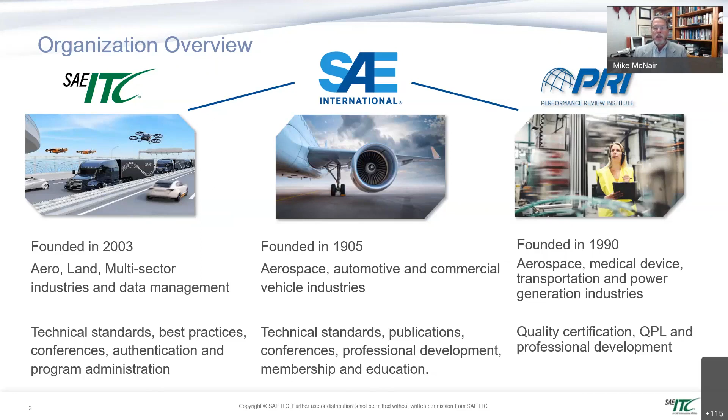So looking at this from a different point of view, with SAE ITC, we bring organizations together. SAE International brings individuals, experts in their fields, together. But there are moments where within an industry it is important to bring organizations together so that they can collaborate with one another and solve problems and address issues that exist at an industry level. In doing so, we've put together forums or consortia to make that happen and to facilitate that communication and cooperation.

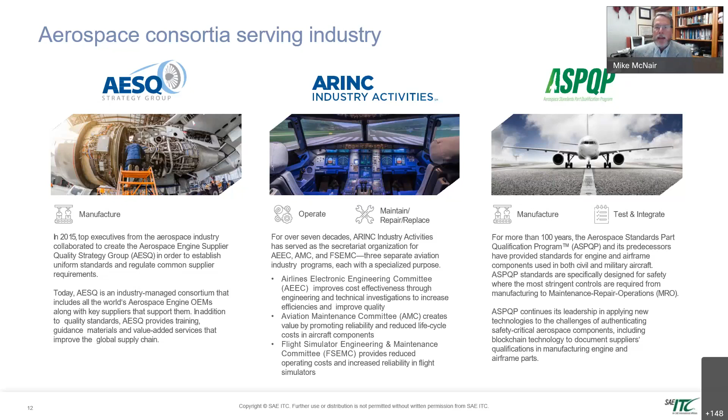We also have programs in our land-based area: the Automated Vehicle Safety Consortium, the International Alliance for Mobility Testing and Standardization, the Mobility Data Collaborative, and the Product Identification Number for Off-Road Vehicles program.

Each of these addresses ground-based vehicles, but because of commonality in technology and tools, we see a collaborative effort between aerospace and land-based programs, and that effort between the two is very profitable and very useful.

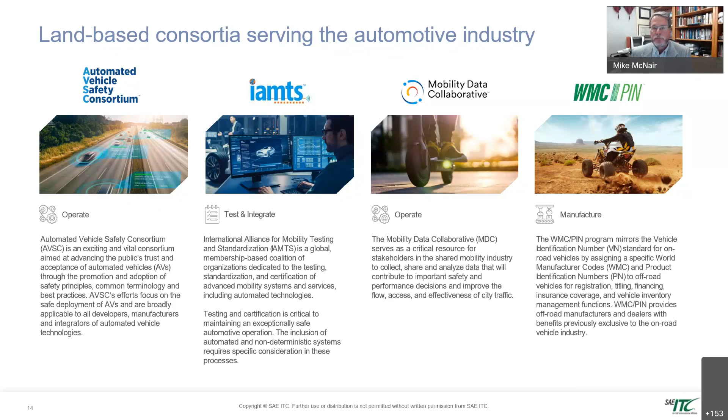You can see in a similar diagram the span of these land-based programs and how they stretch across different areas of ground transportation.

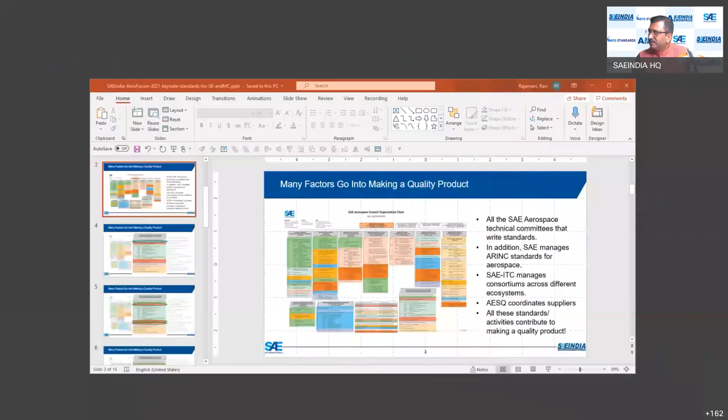Thank you, Venki, that was a very nice introduction, and thanks for the invitation. Now let's see, how do I get this to work? Let me know when you can see my screen. We are staying on... Yes, we can see your slide. Kindly put it in the slideshow if you don't mind. That's a tough one, okay, let's see. Okay, over to you, sir.

What are you seeing, are you seeing the presentation or are you seeing my screen? I am seeing aerospace standards for efficiency and quality. Is it the speaker view or the presentation view? A full view, presentation view. Yeah, so I don't have to mess with it. All right, this has always been a problem for me. I'm glad I figured it out this time.

All right, so I'm going to talk about efficiency and quality, which is what Ravi Kumar asked me to talk about. I think one part of it is sustainment - that's what I'm going to concentrate on, because that's really what I'm interested in. Hopefully that is something I'll make you guys interested in as well, and hopefully some of you can join us in this journey.

Efficiency and environmental quality is the big deal these days - these are some of the big programs happening. I'm sure all of you know Pipistrel got its certification, the first time an electric aircraft has been certified, which is great, but many more are coming. There's also hydrogen going on. And the conventional OEMs are not falling behind - they are also increasing efficiency with their geared turbofan, open rotor concepts, and the ultrafan. So the world is moving on - yes, the future might be electric, but it might be other things as well.

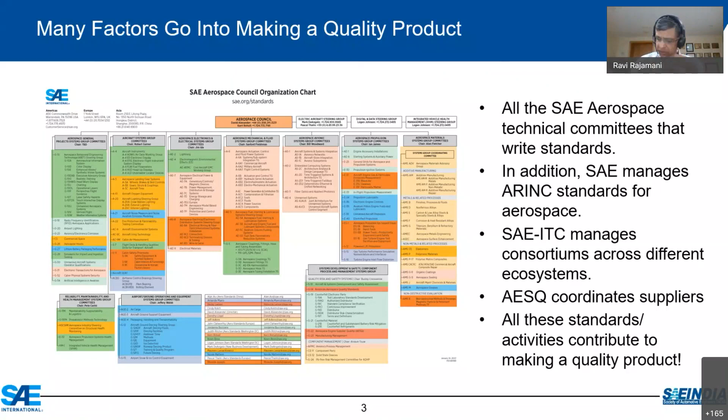Between SAE and ARINC, the organization produces several thousand aerospace standards. I think David gave you a good idea of the total number of standards, so I won't go into that. In terms of design and certification, which is really the key to having a good quality product, there's the systems development, safety, component processes, and management.

The systems group includes S18, G19, G22, etc., and G14. This is the group which actually deals with the basics of design and certification and quality within aerospace projects.

The quality standards come under this systems group. The counterfeit parts and materials, which is what you heard about yesterday, also falls under this. So this is probably one of the best systems groups to associate yourself with if you're interested in the area of design and certification.

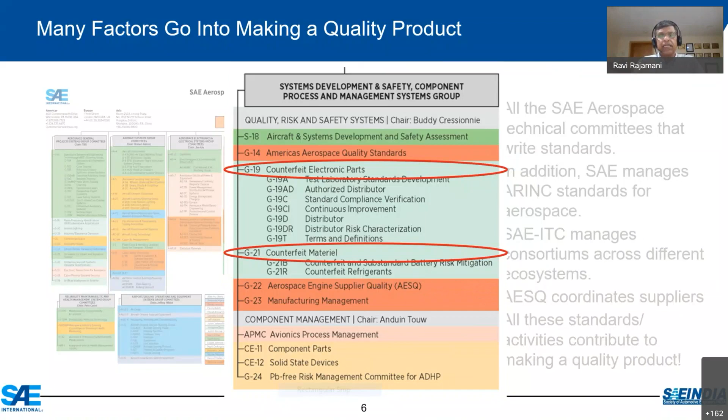As part of this is one of the most important groups within SAE, which is S18, which produces 4754 and 4761 and many other related documents. This is something I know a lot of you are very familiar with.

In terms of the systems engineering process that brings about an aerospace product to fruition, these are the tools that are needed within it. And as you can see, safety is a big deal in this, as part of the design process.

But it doesn't end there. Certification has several aspects to it. There is the product, as you can see, which is the airframe, the engines, the propellers, and all the subsystems associated with this. There's also the process, which is the manufacturing, the software development, as you guys are very familiar with, DO 178 and 254, etc.

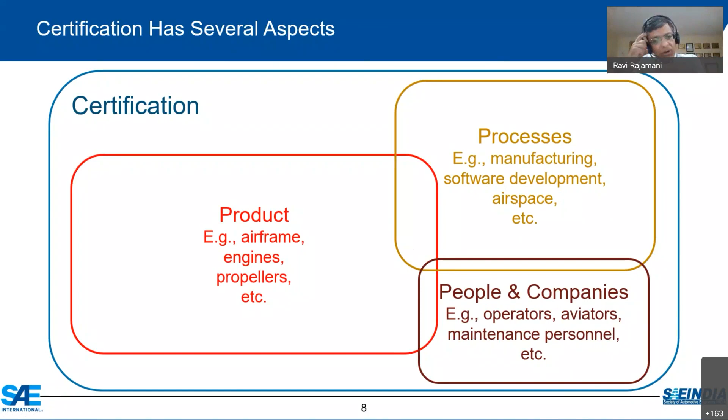The airspace as well, air traffic management, all that has to be certified as part of the safe aerospace environment that we live in. But there's also the idea of certifying people for flying, for maintaining, etc., and also the companies, because the processes associated with the manufacturing depend on the companies that actually run it. So they have to be certified as well. So there's a huge ecosystem that goes along with this whole certification process.

But it's not just design and certification. One of the major things within this ecosystem is how to establish rules for maintaining these aircraft as they age. That is where instructions for continued airworthiness come in. This is the way regulators develop rules, or actually work with industry to develop rules, to ensure that the aircraft can be maintained over its life cycle. It includes airworthiness directives, engineering changes, bulletins, etc., as a lot of you are well aware of.

But two of the main items are the instructions for continued airworthiness, which is documentation that gives instructions for how to maintain, and also the limitation section, where you have to be very, very cognizant of when things run their course, what is the usable life of a part, etc.

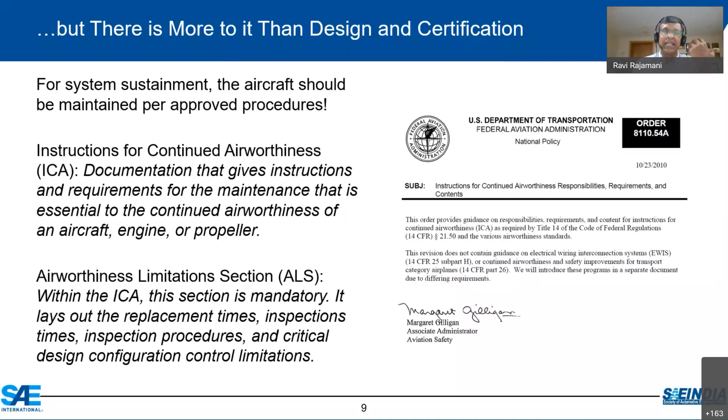So this is a key part of the aviation sector, which sometimes gets ignored. I wouldn't say ignored, but it's not as sexy a topic as the design and certification part of it. However, we in the health management community are very much in this part, and the IVHM, the Integrated Vehicle Health community, is involved with the regulators and with groups such as the MPIG, which actually develops guidelines for maintenance in the aerospace area to develop all these standards.

So I will highlight a few of these within the IVHM steering group. Rhonda Walthall talked to you about the IVHM steering group yesterday. For those of you who attended, I am now the chairman of this group.

Within this steering group, we have the E32, which is the Propulsion Health Management Technical Committee, the AISC SHM, which is the Technical Committee for Structural Health, the HM1, which is the IVHM Technical Committee, and the G11, probabilistic methods and maintainability. They're actually changing the name a little, but it hasn't been finalized yet.

Some of the key documents that have been published in this area of continued airworthiness and the use of health management functionality and systems within this ecosystem are ARP 5987, which is how to get maintenance credits, and it is now being worked on and being updated.

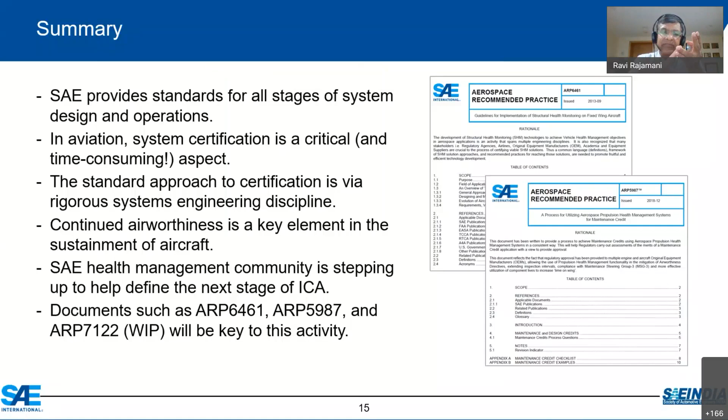It lowers costs, but increasingly it also enhances safety, which is key to sustainment. With that, I thank you. Are there any questions?

Any questions in the chat box, members, SAE team? So far we have not received anything, Dr. Ravi. That's perfectly all right. I have one question.

This is regarding the maintenance credits you mentioned, in terms of the cost savings. Do we have the necessary approvals from the FAA and EASA as of today, or is it in the process? Very good question.

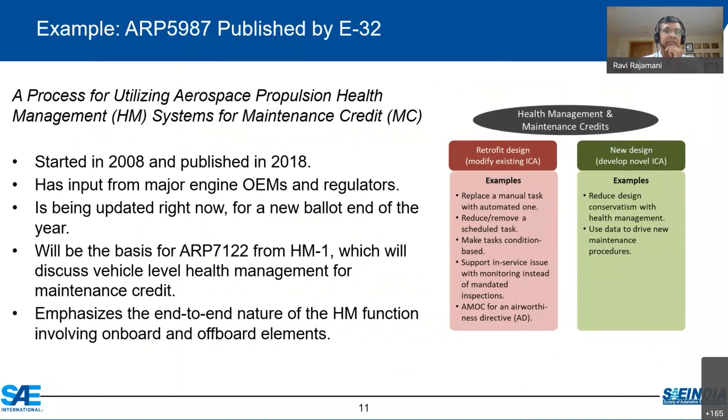For the rest of the audience, that is one of the biggest initiatives we are taking within the steering group, the IVHM steering group. We have an initiative to work with the authorities as well as the MPIG to develop processes whereby health management systems can be approved.

Let me give you a couple of documents that the regulators are working on. One is Advisory Circular 43-218, which is on guidance for how to certify health management systems. It has not been published yet, but it has gotten all the feedback from the industry. It is going to be published anytime soon. We are working with that group.

The other group we are working with is headed by the FAA. It is called the IMRBPB, the International Maintenance Review Board Policy Board, with 10 major regulators. I'm really surprised that India is not part of this, considering it is the second biggest aviation market.

Well, third biggest today. I think that DGCA should be part of this. I'm going to see how we can change that one of these days. But they come together and figure out how to regularize maintenance rules across the world. And they work closely with MPIG.

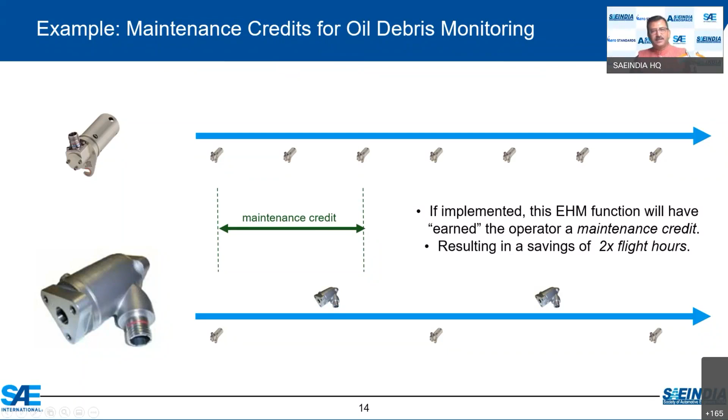So, ladies and gentlemen, after having listened to SAE ITC and the IVHM story, now it is time to move on to UAS. You can be seated wherever you are, but we're going to send it to the unmanned aircraft systems session with Dr. Mark P. DeAngelo. The scope of unmanned aircraft systems and autonomy is enormous, encompassing small drones, large UAVs, fixed wing, traditional rotorcraft, eVTOL aircraft, conventional power plant configurations, and distributed electric propulsion, DEP.

Don't tell anybody, SAE India has just completed the first ever Urban Air Mobility virtual symposium last week. Guess who was the chief guest? The chief guest was the Honorable Minister for Civil Aviation, Shri Jyotiraditya Scindia. And on the second day, the chief guest was the Joint Secretary of the Ministry of Civil Aviation, Mr. Amber Dubey.

So now over to the speaker introduction. Dr. Mark is an aerospace engineer and aerospace initiatives manager for SAE International with over 13 years of experience. He is the SAE spokesperson for Advanced Air Mobility, AAM standards and integration activities, collaborating with SAE, NASA, FAA, ICAO, and industry. Dr. Mark co-chairs the Airworthiness Group, WG1, and co-authors the ANSI UAS Standards Collaborative Roadmap to support rapid development of needed standards to facilitate safer and faster integration of UAS into the National Airspace System, NAS. He actively supports the G34 Artificial Intelligence in Aviation Outreach Committee and its podcast. Dr. Mark earned a BS, MS, and doctoral degree in aerospace engineering from Penn State University. He also holds an FAA Part 61 private pilot certificate.

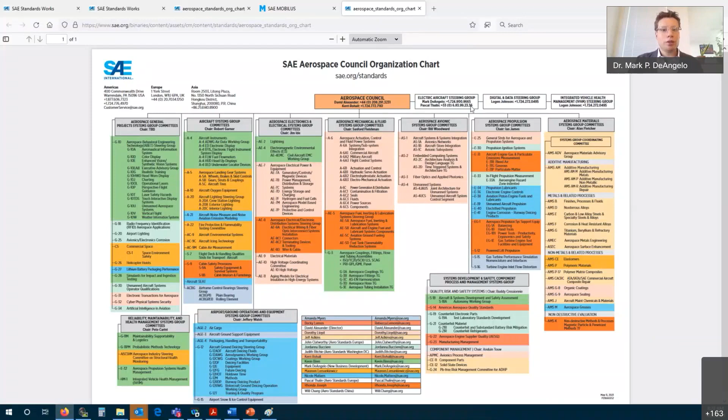So back to our presentation. Again, I wanted to emphasize that there are over 200 of these committees, and they cover the wide spectrum of aviation-related topics, aerospace-related topics, and a UAS is an aircraft. So if you're going to design, develop, certify, build a UAS, you're building an aircraft. So there are thousands of SAE standards that go into the design, the development, the production, the operation, and the support of an aircraft in the aircraft ecosystem. So many of those standards apply already, just as they would to a manned aircraft because it's an aircraft.

Now, there are some specific provisions for UAS, and there's some specific aspects of UAS that make UAS a little more unique. And with that, I handpicked some standards committees that have some specific documents or have documents specifically for UAS. So we're going to just dive right into those committees and those documents.

Now, as mentioned before, just before me, Ravi Rajamani mentioned the ARP 4754 and the S18 committees. Well, this is an overview of that committee. S18 is a joint international committee with EuroCAE WG63, Aircraft and System Development and Safety Assessment. It brings together qualified specialists for the advancement of aerospace safety and to support effective safety management and development processes.

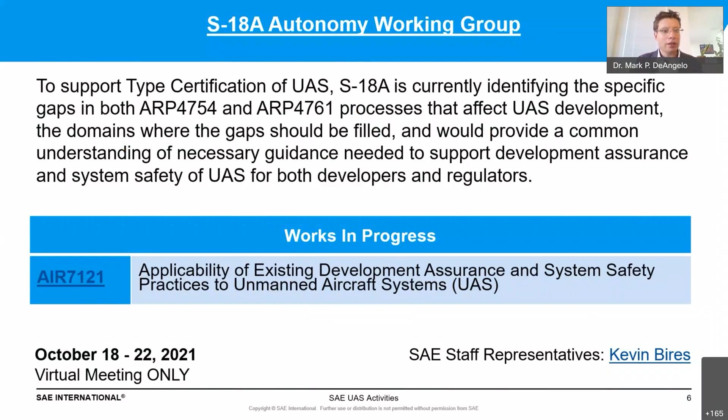All of these published reports call out and annotate SAE G34 and EuroCAE WG114 as the standards committees to develop standards for AI in the aviation ecosystem. This includes the ANSI standardization roadmap for UAS, the EASA AI roadmap, the EASA concept paper, the AVSI report, the Fly AI report, and NASA's upcoming AI roadmap.

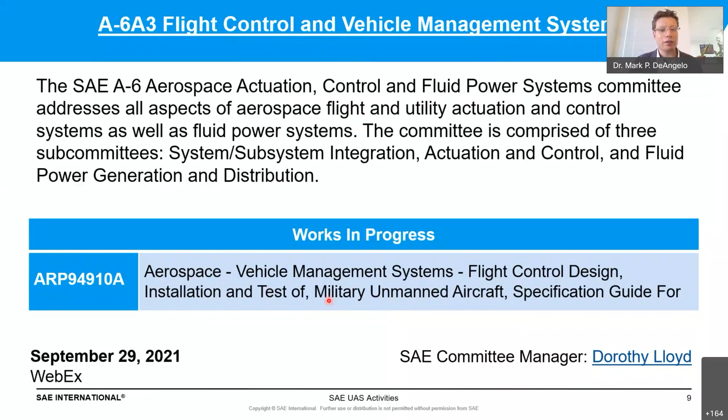They have 3 subcommittees and are working on a document for the flight control design, installation, and test of military unmanned aircraft. This next committee is the AS4 JAUS. It is a message-based architecture that defines data formats and methods of communication among computing nodes. The architecture defines messages and component behaviors that are independent of technology, computer hardware, operator-used communications equipment, and vehicle platforms.

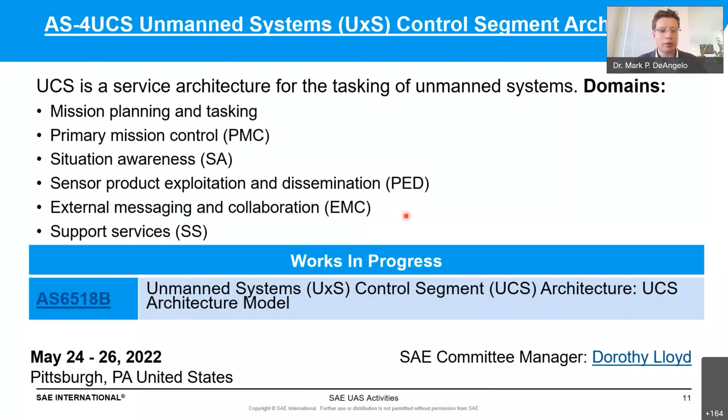This committee, and the next committee AS4 UCS, are standards committees developing products specifically for the United States Department of Defense, but their standards could be used by anyone, including civil domains as well. The E39 Unmanned Aircraft Propulsion Committee published their first standard, ARP 6971, for power and torque determination for UAS engines. This sets a standard for determining the engine performance.

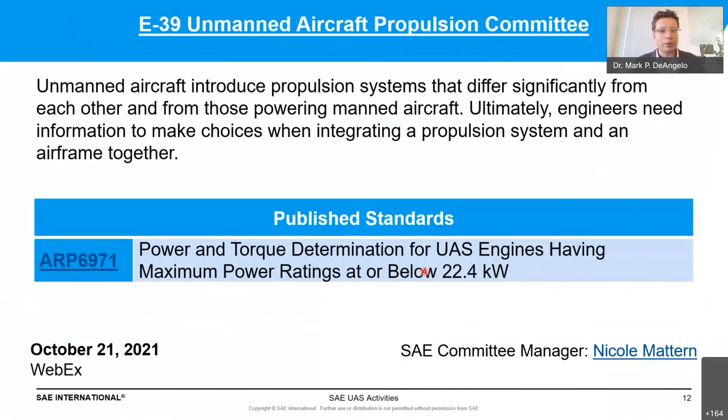A20B Exterior Lighting Committee developed a standard for lighting applications for UAS. AC9C is the Aircraft Icing Technology Committee, which deals with airborne de-icing, the aircraft de-icing itself, not to be confused with ground-based de-icing which sprays aircraft with de-icing fluid—we have that committee as well, but this one deals with in-flight de-icing. They're working on a document called AIR 6962, Ice Protection for UAVs.

Next slide, AE8A, Electrical Wiring and Fiber Optic Interconnect Systems Installation. They have a document for wiring for all types of aerospace vehicles, and they're analyzing the impact of high voltage on wiring as well.

So where could we get all of this stuff? It's accessible on SAE Mobilus, a great research platform, as well as SAE.org. This helps you search for all kinds of content, anything from standards to tech papers, journal articles, videos, courses, just about all the types of content we have, and books as well, edge reports.

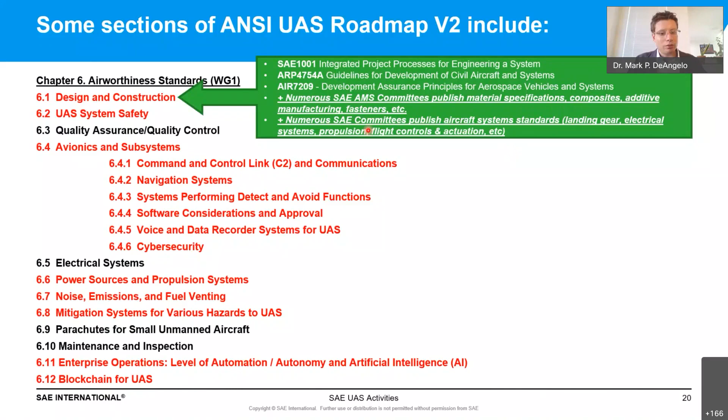Then if we jump down to UAS system safety, you have your ARP 4761, and for continued operational safety, you have ARP 5150 and 5151A. For quality assurance and quality control, you have the family of AS9100 standards, which is the quality management standards, as well as the counterfeit avoidance standards. Those include G19, G21, G22, and G33 configuration management standards as well.

Then when you look at command and control link and communications, there are numerous SAE ITC ARINC standards that can apply. For navigation systems, we have the SAE PNT committee, position, navigation, and timing.

These standards are listed here, as well as the SAE, ITC, ARINC standards. PNT has launched a specific standard to fill gaps identified in this roadmap, SAE 1026. This standard was just launched.

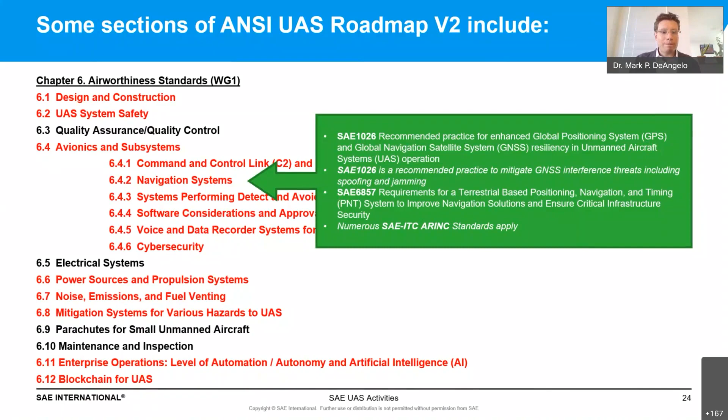Next, we have systems performing detect and avoid functions. I jumped ahead—this should be pointing to the software considerations.

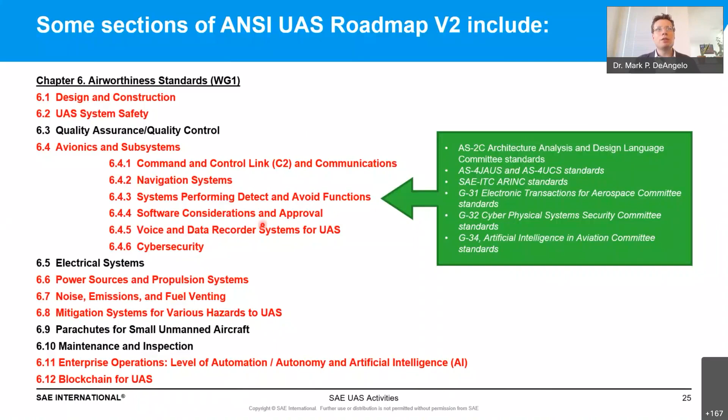This group of standards is for voice and data recorder systems, and for cybersecurity, the G32 committee is developing these documents listed here.

For electrical systems, there are several committees. Many are AE committees, like aircraft and aerospace electrical committees 2, 4, 7, 8, 9, and new high voltage committees such as AE10 and AE11. A6 and A20 also tie into electrical systems, especially flight control systems and electromechanical actuation.

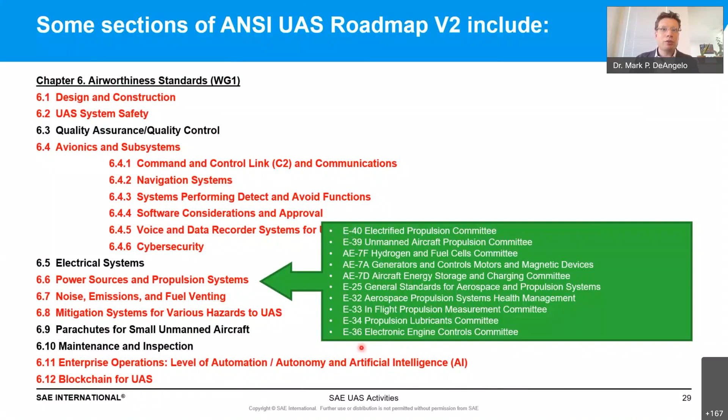For power sources and propulsion, there are many SAEs—one of our biggest strengths in standards is in propulsion systems, so there are many committees developing standards for propulsion systems.

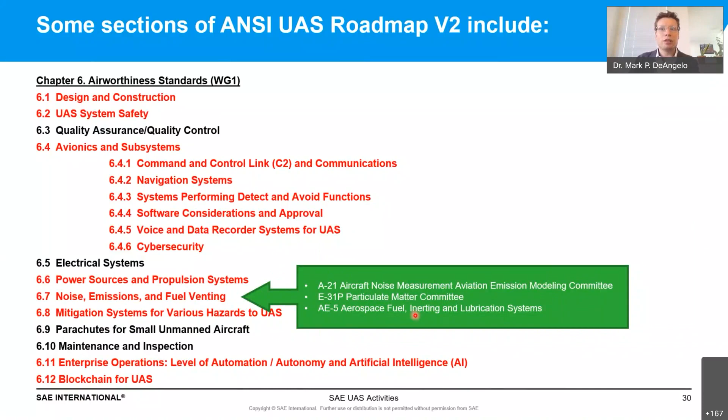For noise emissions and fuel venting, we have a noise committee, A21, E31P on particulate matter, and AE5 on aerospace fuel inerting and lubrication systems.

To protect aircraft, we have ice protection, icing technology, aircraft ground de-icing with G12, and a lightning committee to protect aircraft from lightning strikes.

At the bottom, we have AI and autonomy, comprising SAE S18A and G34. And again, for continued operational safety, we have these standards.

We also have the commercial services as well—Ritesh will talk a little more about this. And on chapter 10, for UAS flight crew, we have these standards and committees as well.

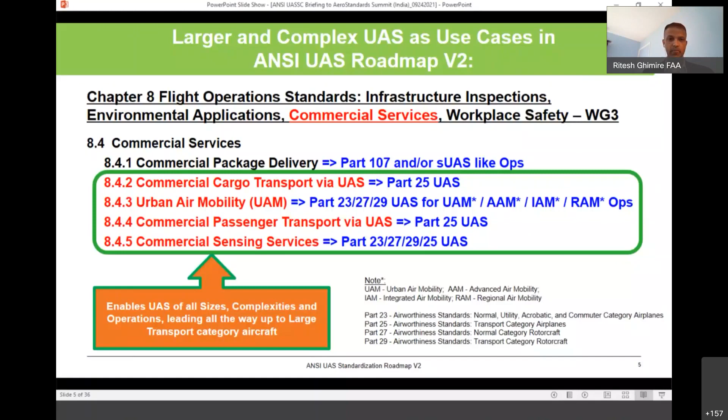So in summary, the scope of the roadmap is the UAS of all sizes, complexities, and operations. This slide here shows that standards are needed to support the remote control station (CS) of UAS of all sizes, complexities, and operations.

And the control station topic is placed under section 6.1, design and construction. Again, this section really encourages - we do not task any committee or working body or organization - this section encourages industry to get together to start thinking about developing needed standards to address the remote control station.

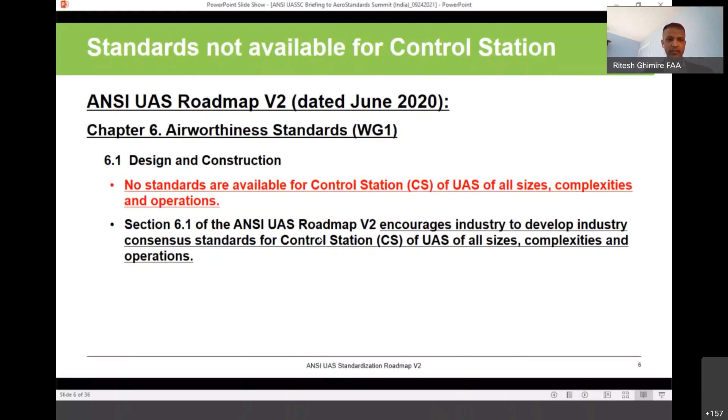Last year in June, we published version 2 of the standardization roadmap. And just a few months ago, in June 2021, ANSI published the GAPS progress report. This report is 47 pages long, full of tables about which committee has published what document in the last year since the publication of version 2, and which committees have created new work in progress, or WIP, in-development standards. This progress report will be very handy for all of you, especially engineers and scientists working for government think tanks and industry in India. It's a very slick document, and version 2 of the roadmap is 412 pages long, but thorough and comprehensive, highlighting activities of all the standards bodies, pertinent government agencies, and international entities that have been directly and indirectly involved in UAS or drone standardization and integration.

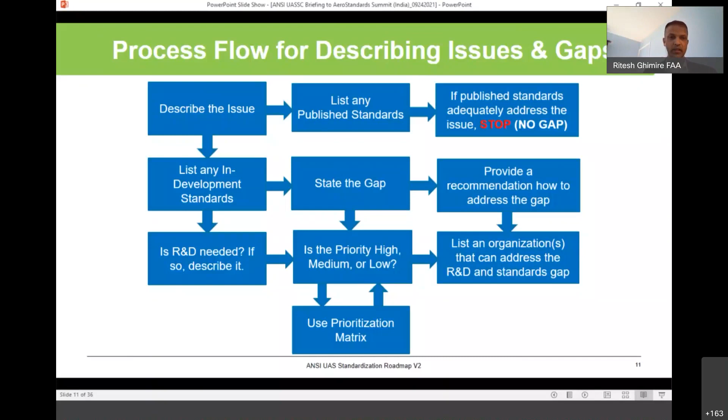We use the prioritization matrix to evaluate the different priority levels: high, medium, or low. Then we also tag along with the list of recommendations on how to address the gap, as well as the listing of organizations that can address the standards gaps and the associated R&D component to it. So these are just two components that we use to calculate, in our prioritization matrix, the composite quantified value.

In this case, we use C-A-S-E. C stands for critical aspects, which deals with safety and quality implications. A is whether we can achieve it or not, or time to complete, and the corresponding numerical values.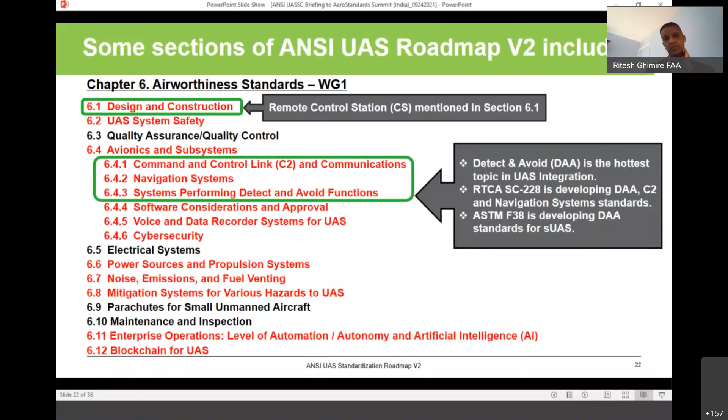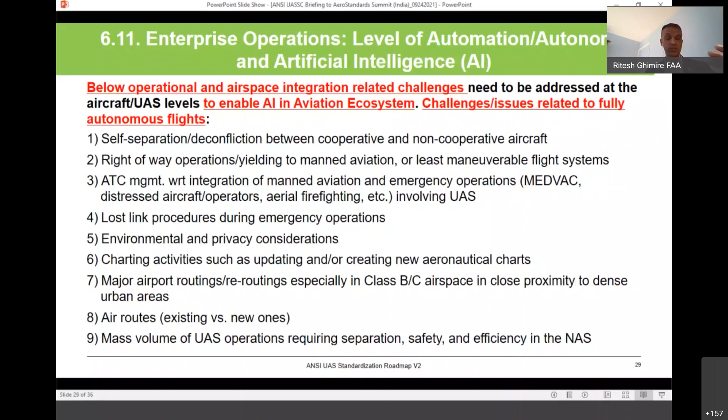This has the list of operational and integration challenges, some of which we need to address at the design, development, and certification phase of unmanned aircraft. So again, this is what it looks like.

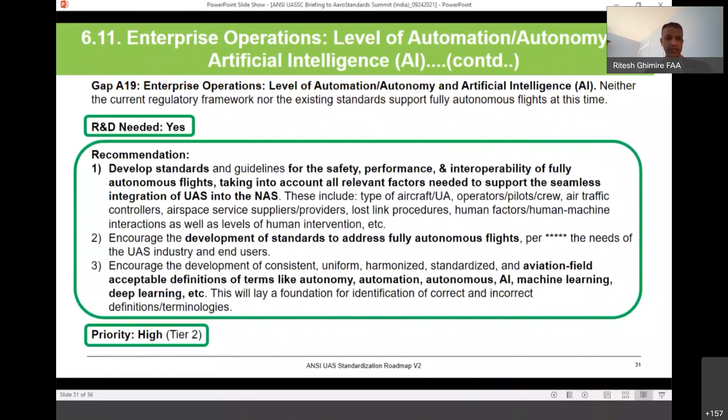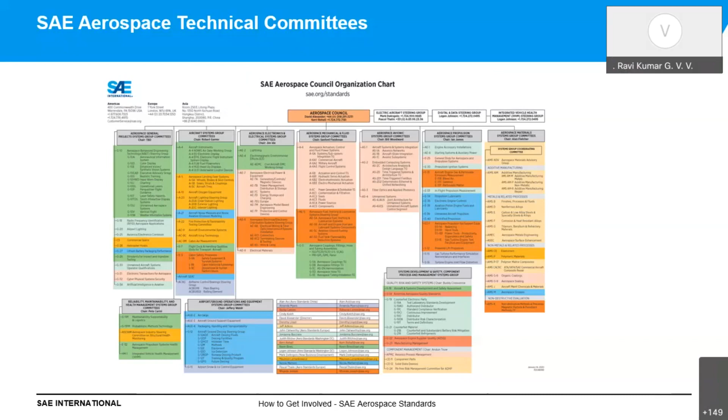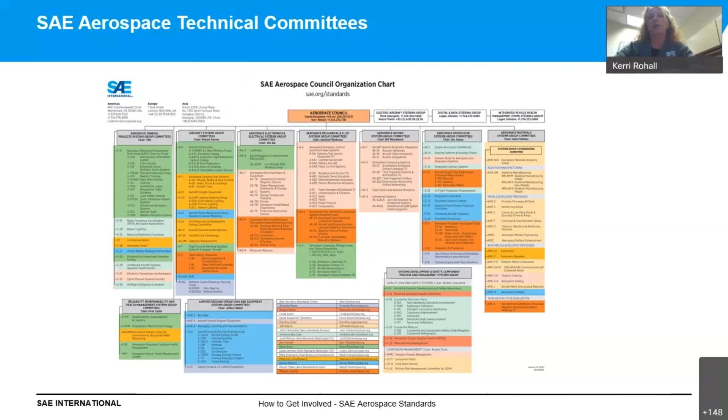Technical committees, okay, yeah, okay. So as I had said, this is the organization chart. I believe during the last presentation my coworker Mark D'Angelo had actually sent the link in the chat to this chart, so if anyone wants to take a closer look. But as I had mentioned, this is a list of all of the current technical committees that we do have under the aerospace sector. You can go to the next slide.

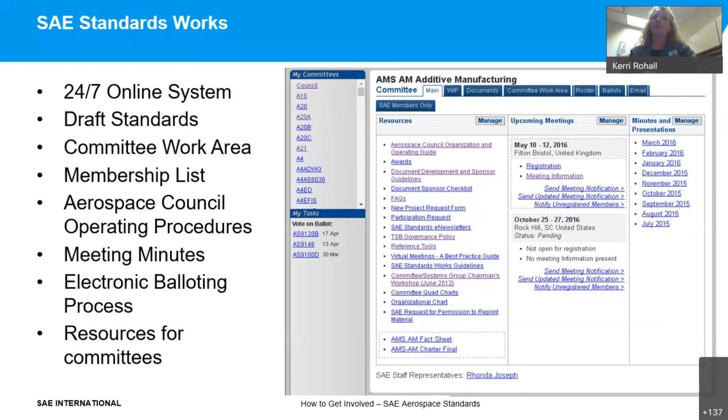Okay, so basically how to get involved. It's very important that the process is understood to be open to everyone. We welcome everyone to participate, to be vocal, to have a seat at the table, and to have your say in these standards being developed. We welcome your involvement, your participation. You're welcome to attend, and you're encouraged to attend.

Most of our meetings right now are still virtual, with only a handful being that hybrid face-to-face and virtual format. But with the hopes that things continue to get better, we will get back to having face-to-face meetings at some point next year.

You're welcome to contact me, my information will be on the last slide. On the chart that Mark sent the link to, which is also shown at the very beginning, I realize it's very hard to read, but in the bottom left of this current slide, every committee has a committee manager that works directly with that committee. All of those contacts are also part of that chart. If you don't have access to the chart, please contact me, and I'm happy to put you in touch with the appropriate person from my team who can help you get involved, get on that committee roster, and give you any information you might want regarding a particular committee.

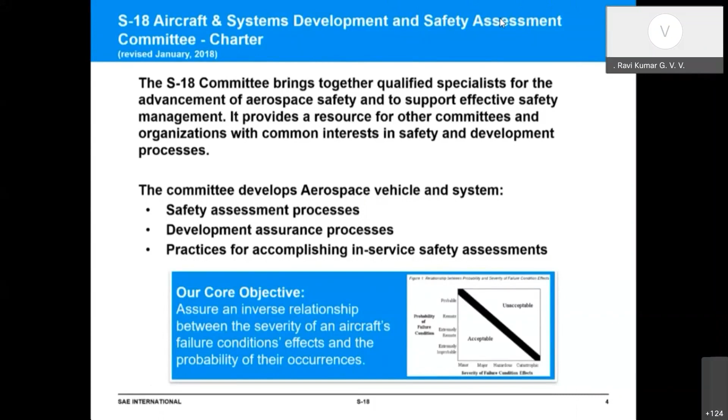Our sister organization in EuroCAE is called Working Group 63. Its title is Complex Aircraft Systems, and its objective is similar to ours: to provide industry with guidelines relating to the safety of aircraft systems and equipment for development and in service. We're ultimately working towards the same objectives, and in most cases we have parallel documents between S18 and Working Group 63 that are either a slight modification or a repeat of those documents, and I'll point that out through the presentation.

Again, my name is Bob Roth, and I'm at Merlin Labs. S18 has a vice chair, Dave Mergen, who's at Boeing Commercial Airplanes, and our secretary is Mike Norman at General Electric Aviation. Our SAE staff representative is Kevin Byers, who's normally the chief point of contact, especially when you're interested in the committee. Working Group 63 is a European-based organization led by Chris Lacey from Airbus, and his co-chair and secretary is Julian Chow at Liebherr Aerospace. Generally, S18 and Working Group 63 meet twice a year, though S18 has 4 meetings a year that are quarterly, and we'll touch on that as well.

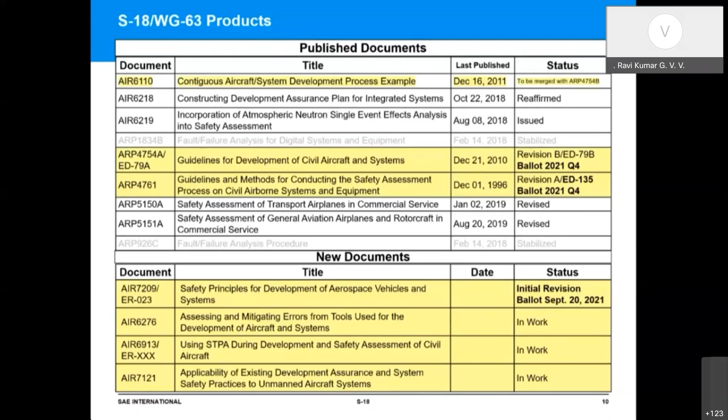Here's an overview of the S18 committee organization and structure. Of course, I'm the chair on top, and our vice chair is Dave Mergen, and secretary is Mike Norman.

SAE representative Kevin Byers keeps us informed and makes sure that we're doing everything correctly according to SAE rules. Our organization is rather flat. We have a few working groups. On the side, you can see S18A is our very active autonomy working group. It is partnered with the SG1 organization in EUROCAE, so they actually all meet together in their regular calls.

They're producing a document, AIR 7121, which we'll talk about later. That's being sponsored by Corey Laughlin. The S18C in-service documents were recently revised, so that organization is currently dormant. And the S18D, the single event effects working group, is also dormant because they recently published as well. So the majority of activity occurring in our organization is directly tied into the top level S18 organization.

We're going to talk about these elements through the presentation. As the committee as a whole, we're a rather large committee and a pretty international committee. We have 94 voting members, which means each of these documents will have to get a fair number of votes on those ballots. We have 35 certification authority participants, so they're either voting members or liaisons, and 303 liaisons.

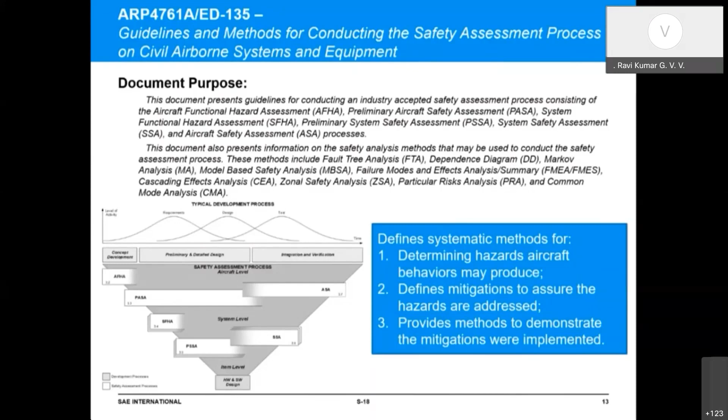If you recognize this diagram, or those like it, it's the development V, and our process of the safety assessment fits inside that. Just as a reminder, these are the blue boxes that I showed earlier about the safety assessment process, from defining hazards, assigning requirements based on those hazards, verifying they were implemented, and then ultimately showing the conditions were addressed. This is the toolbox by which we do that activity.

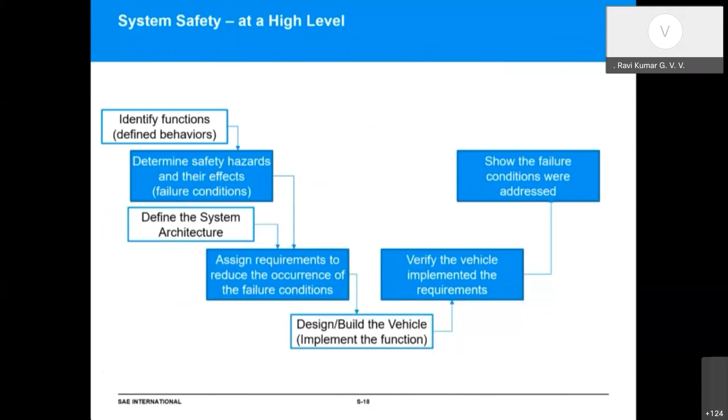So we need to go back and make sure that we had an effective description of those documents. But this also affected every other document that those two documents touch. So the inputs and outputs to a PASA, Preliminary Aircraft Safety Assessment, will affect a functional hazard assessment, the FHA, the system functional hazard assessment, a preliminary system safety assessment.

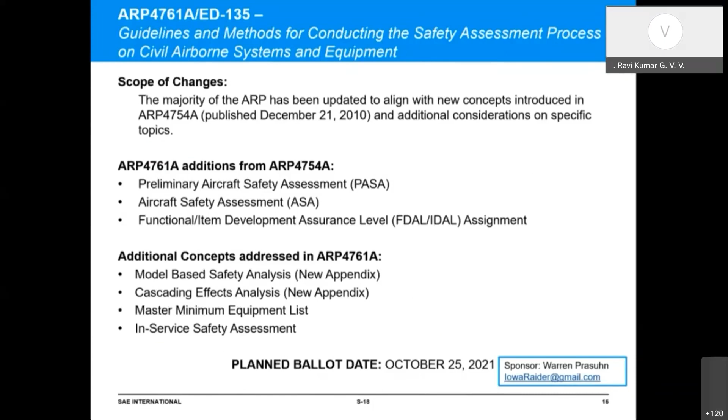Related to 4761A is actually 4754 Revision B. As I noted earlier, 4754 Revision A came out without addressing the safety assessment process, so we don't want to make that mistake again. We're doing a parallel release of these two documents to make sure they're synced up.

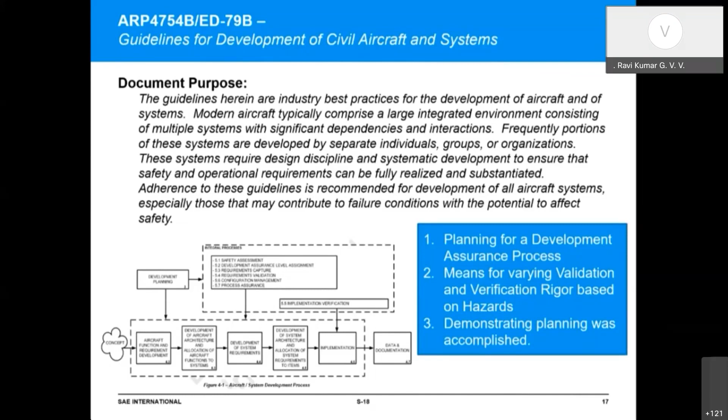4754 talks about the planning and development assurance, means of verifying and validating requirements based on the rigor of the hazards that they address, and demonstrating that that planning was accomplished. This is a diagram I showed earlier.

There's a number of changes we're doing. I'll talk to a few of these in more detail. We are aligning to the scope of 4761A, since we don't want to get out of sync with this revision and want to make sure the content is aligned. We've improved development assurance planning discussion, improved our discussion of validation and verification, aligned our modification section with the other ARPs. We've also changed the objectives, in how we describe them. And we're integrating AIR 6110, as I mentioned previously, as an appendix for 4754B.

I'm going to talk to these four topics because they are actually the most detailed elements that we're changing, and pretty significant beyond lining up with 4761A.

If you're familiar with 4754A, which describes development assurance processes, it talks about development planning, and it talks about planning throughout the document, but it never really addressed as a whole what a development assurance plan is and how it might be different from development planning.

We've also seen in the industry that regulators have asked for a development assurance plan, which was never mentioned in the ARP. So we've rethought how the planning is described in ARP 4754 Revision B. We've created a dedicated section for development assurance planning to bring together all of these thoughts to solve that problem. What does it mean to plan for development assurance?

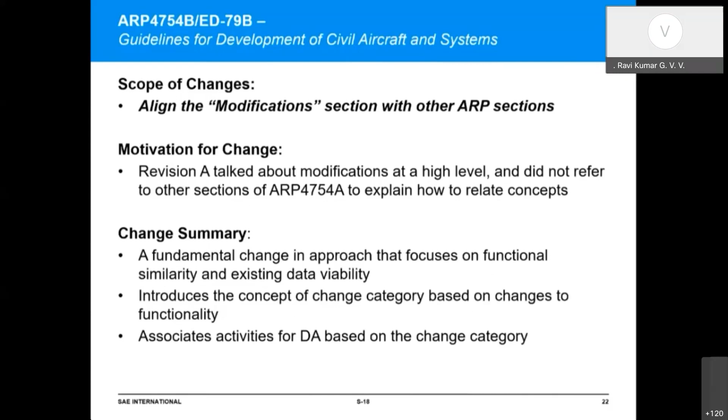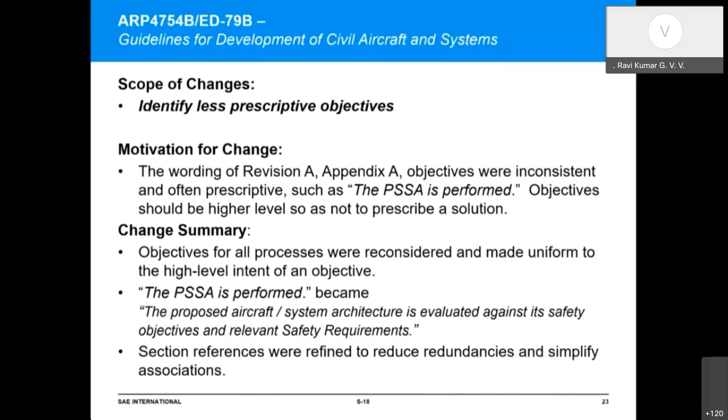AIR 6110 has been a standalone document and in a lot of cases has been ignored. This is actually equivalent to what ARP 4761 has - ARP 4761 includes a contiguous example of how the process is conducted, and it is an appendix to that document. ARP 4754A, which describes development assurance, didn't have that as part of the document.

It was published later just based on deadlines. We thought this was a mistake, and we wanted to bring this into ARP 4754B. So not only are we bringing this document into ARP 4754B where it belongs, but we're actually aligning both processes in this example, so you can see the flow of information between the two processes as you read both examples. I think this will be significantly beneficial to readers, especially new readers of these documents.

There's been a lot of work going on with this document as well, but we hope to ballot this near mid to end of November based on how we do with ARP 4761 as well. This way we can have both of these documents out in short order, which will allow us to see how all these processes fit together better.

A new document that we are going to ballot is AIR 7209. This is the third ballot. We've gone through quite a few reforms of the document, but really it's a higher level discussion around ARP 4754 and its objectives and what the actual intent of these things are. This higher level view is to help with what we call advanced air mobility platforms or new entrants who want to understand development assurance and apply it and may have different ideas of how to apply this. It's more of a discussion AIR at this point, but it depends on how people read and view this document. We are planning to go to ballot on September 20th, so by the time you see this recording, hopefully we will have this already out.

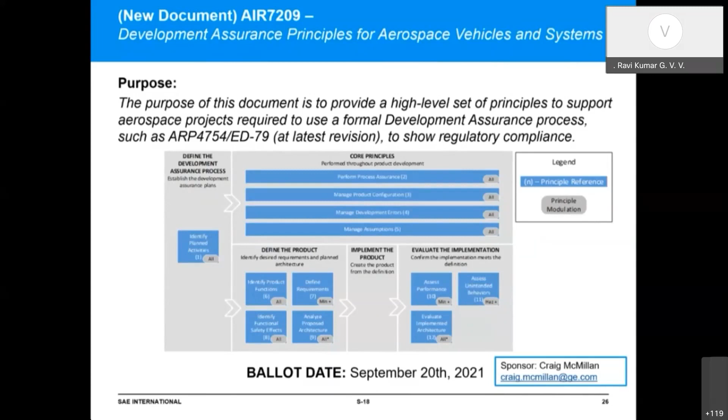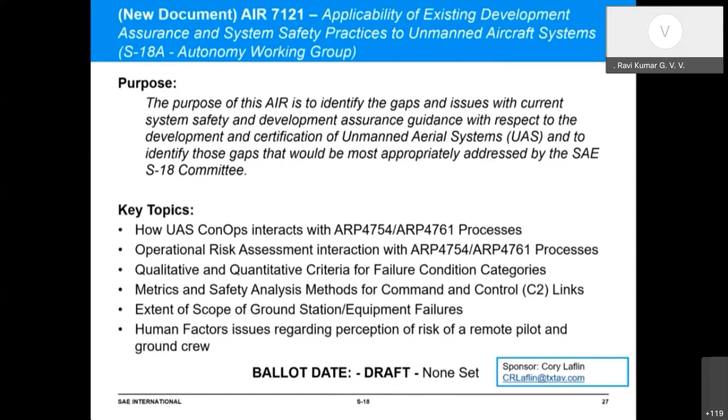The tools, AIR 6276, is one that's been in work for a while, but has been put aside because of our focus on the ARP. We have a lot of specialists that work both on those ARPs and this tool set. This is to explain how tools are used in the role to support the safety assessment process and development assurance process. It gives modeling considerations of that system development process and the aspects of those modeling considerations, and it'll give some case studies relative to a control system and an avionics network. This has been recently picked up again, so we don't have a draft date set for ballot.

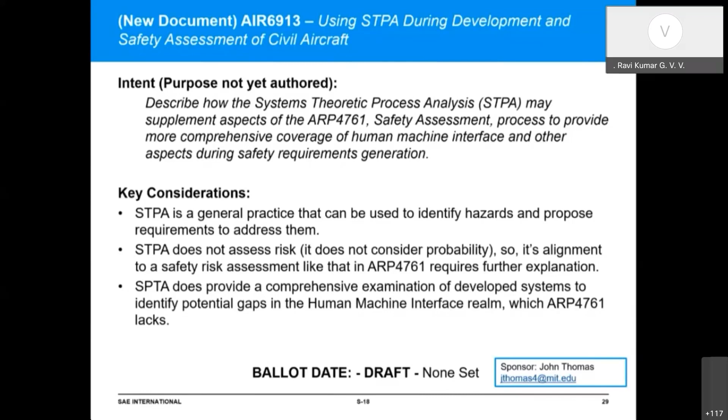Another new work that we are working on is AIR 6913. This is sponsored by John Thomas from MIT, and it's an explanation of how the Systems Theoretic Process Analysis is applied in the context of safety assessment. Safety assessment, of course, identifies hazards, but also provides probabilities, whereas the STPA process only talks really to hazards. However, there's a lot of benefits STPA provides that we know are gaps in the 4761A process, such as human factors and human-machine interface. So we can support this activity by finding a solution that integrates both processes, and that's the objective of 6913, and it's still a draft document with no date set yet.

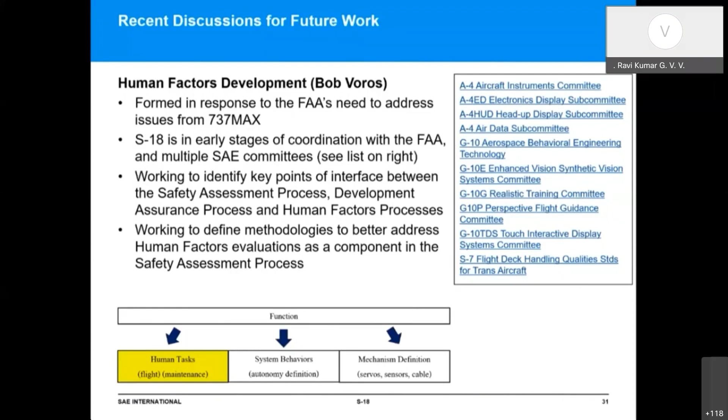A new generic errors team was put together to discuss the additional mitigations that are sometimes requested by regulators and how we can address them. The survey was performed on the S18 committee, and we had 160 respondents. Right now, we're still trying to define the problem, not solve it, to figure out where there might be solutions already either in existence or where there might be gaps that need to be filled.

S18 in general applies a liaison process to a number of organizations. These are the committees that we have active liaisons with, and we are normally coordinating with these as part of our quarterly meeting reviews where we update on liaison activities. Speaking of our quarterlies, we will normally update all existing work and external coordination every quarterly meeting.

Our new work is proposed in those quarterly meetings, as well as our regular work moving forward. Our next meeting is the week of October 18th, and this will be a virtual meeting, so anybody who would like to attend can. The information is on the website, feel free to dial in. The website link is provided below, and the QR code also goes to that site. Feel free to reach out to me or our SAE representative to find out more about the S18 committee.

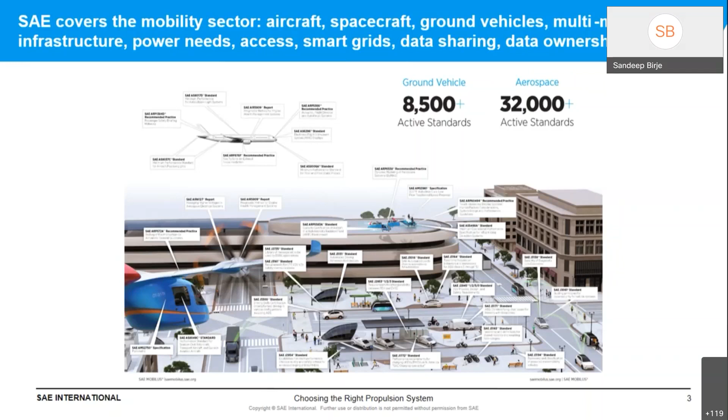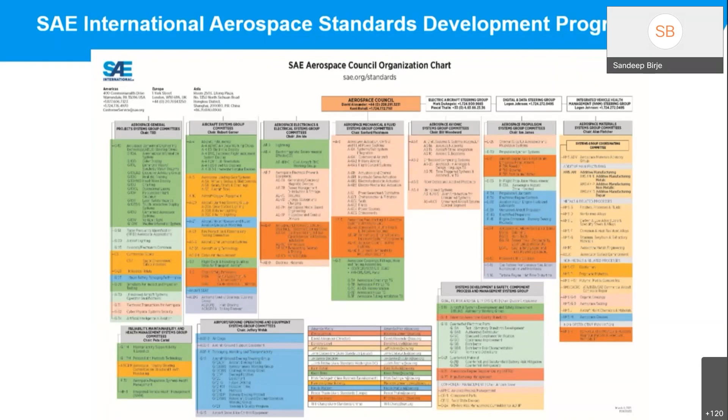We receive input, and then we also give an overview of where we are and what are our activities as well. One of the reasons is to see if there's any opportunities to maybe co-sponsor a standard or recommended practice. But the point I want to take away is that there is quite a bit of communication and relationships going on between the committees. Very frequently, some of the committee members that are in the E39 are also involved in the E40 and other committees as well. So there's a lot of interrelationship between all of this.

So now I'd like to talk a little bit about some of the background that really led to us forming the E39 committee, one that is focused on small UAS or UAV propulsion. The primary driver is that when we think of UAVs, they really employ propulsion systems, even if they're all engine systems, that differ significantly from one another based on manufacturer, based on operation, whether they're rotary or whether they're a reciprocating engine, 2-stroke or 4-stroke. As a result, you've got a lot of different options out there for propulsion, but how do you evaluate those on a normalized value?

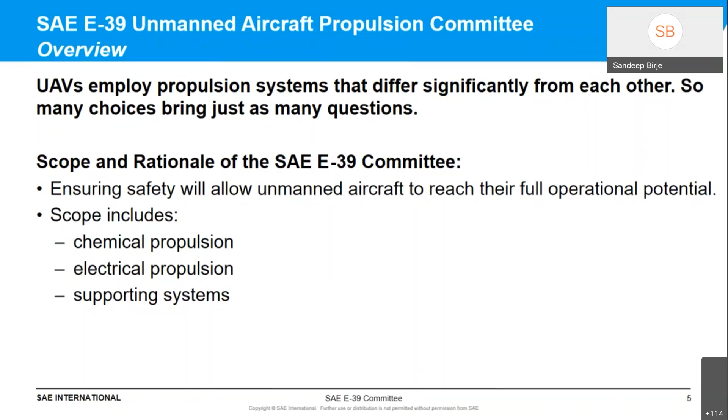So the benefits really to the UAS community and industry are as follows. One is to access a wealth of UAV and propulsion knowledge, which we feel is really fairly represented in our group and our committee. Secondly, we do extensive networking with industry colleagues, the regulators. We have the FAA regularly participating on our monthly meetings, and the research academia community as well is engaged in really a very open forum.

One of our goals is to establish a uniform set of test specifications and to understand well-defined categories and system types as it pertains to the propulsion system. And we also seek to build upon industry best practices and their specifications. And really, there's just opportunities through the committee to really prioritize industry standardization needs, which is really the primary driver for the committee.

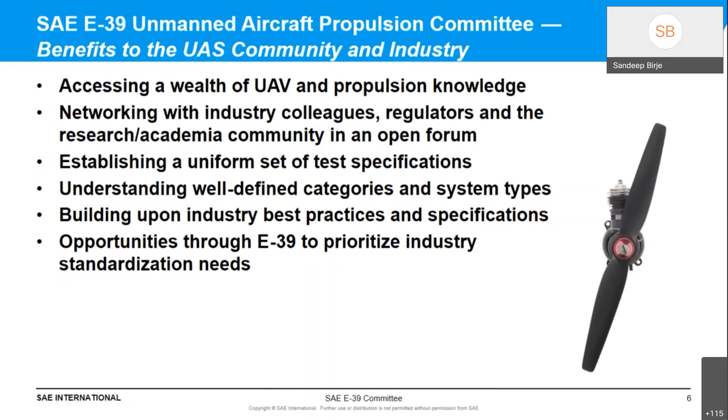I'd like to continue on with the historical perspective of UAS propulsion. When we think about UASs today, and we think about development and technologies, a lot of times our emphasis has really been primarily on the sensors or the payloads that have really been driven on these systems, primarily by the military needs or for some sophisticated surveillance needs. So there are really some conflicts, unfortunately, or maybe conflicts isn't really a good word, but maybe there's been kind of a lopsided view of technology development in UAVs, because all the advances that were done with controls and sensors and cameras really surpassed that for engine development, which really kind of got left behind.

Unfortunately, compared to the large high-tech, or I should say, even the larger engine companies, the automotive or generator or the heavy-duty side of things, really small UAS engine manufacturers' companies are much smaller, much less influential, and they do not necessarily have the capital expenditures that they can then devote to the research side of their companies. The other thing too, it's a very highly competitive field.

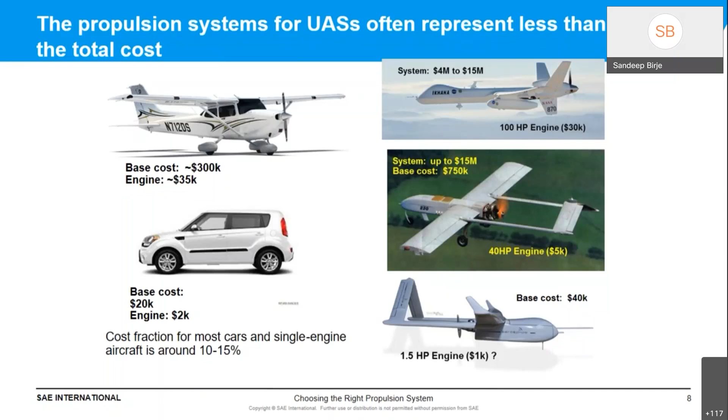I'd now like to say that everything is really starting to change. As the power and energy demands of UAVs increase, there is a heightened interest now in UAS propulsion technologies. We know that the number of UASs, especially the small ones since they're less regulated, are poised for high growth. As a result, operational costs and their reduction are starting to be emphasized now.

Fuel flexibility is desired, improved efficiency is desired, and power demands for UASs are increasing. Those power demands are brought about by the desire to carry heavier payloads, increased CPU and image processing, adding on more spectrometers and instruments, and also more sophistication regarding surveillance and data collection. All of that is driving the power demands, driving improved efficiency, and all of that translates to improved engines, improved propulsion.

I would argue that the engine or propulsion system is really the most critical component of the UAS. It is the primary source of the thermal and acoustic signature of the UAS. It provides all of the thrust, whether it be a reciprocating engine, a turbine, a rotary, or a battery-powered electric motor. It powers the sensors and all the instruments. It by itself defines the range and payload requirements, sets the environmental limits, and frequently sets the total system durability, meaning your UAS only stays aloft as long as the engine is still operating. It is very often the engine or propulsion system that determines whether the UAS crashes or not.

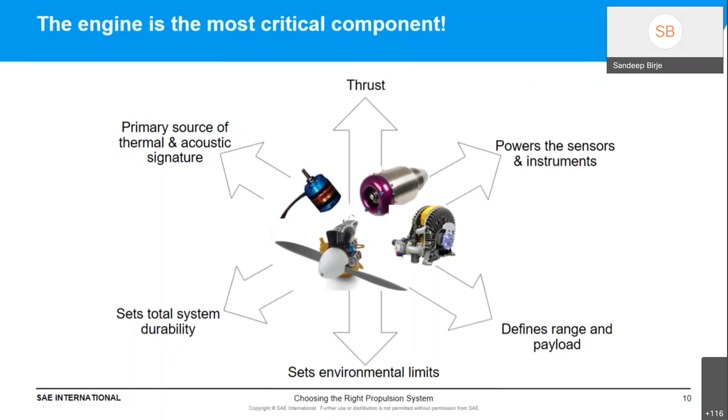Now, the engine is only one component of a much larger system when we think of the propulsion system. It has always been a focus in the E39 committee that when developing standards or recommended practices, we need to consider this not just from the engine or motor perspective, but also from all the supporting systems as well.

That includes the propeller linkage, the fuel storage and delivery system, the fuel pumps and whether there's an injection system or not, the fuel tank and whether it's pressurized or left under ambient conditions. The other important system is the lubricating system on many engines. We're starting to see even on smaller UAVs a separate lubricating system that needs to be considered when developing standards and recommended practices.

We also need to look at the parasitic systems, such as electrical conversion systems, alternators, voltage regulators, and any battery storage on board, and then also noise suppression. These are all very important components of a much larger system. I haven't even begun to talk about boosted systems as well, but there are a number of directions we can go into. All of them need to be considered.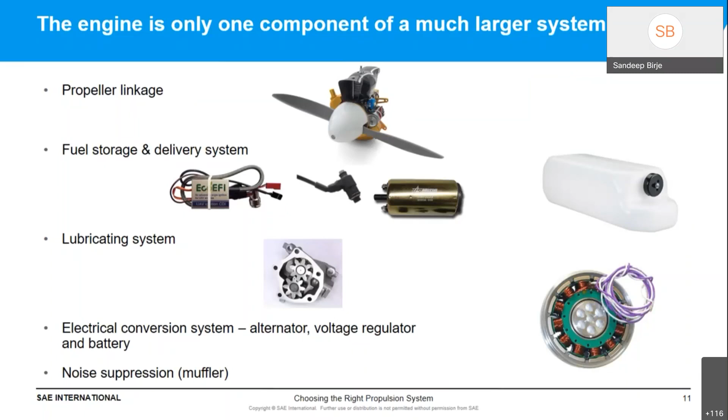We noticed that 6 manufacturers were stating that they're making heavy fuel versions of reciprocating engines, meaning engines that run off a distillate fuel instead of gasoline or a light alcohol-type fuel. The other thing is that UAS size really dictates the propulsion requirements. Micro UASs, those less than 4.5 pounds, are for all practical purposes either electric or single cylinder glow-assist engines, otherwise known as hobby engines we're all familiar with. Smaller UASs, defined as under 55 pounds or 25 kgs, are predominantly single cylinder engines.

In some cases, they're also electric motor driven, but a lot of them are actually single cylinder engines just because of the energy density and power density requirements. The medium-sized UASs are virtually all 2-cylinder, 2-stroke engines or rotary engines. Then, of course, the larger UAS systems are multi-cylinder reciprocating engines or rotary engines or turbines.

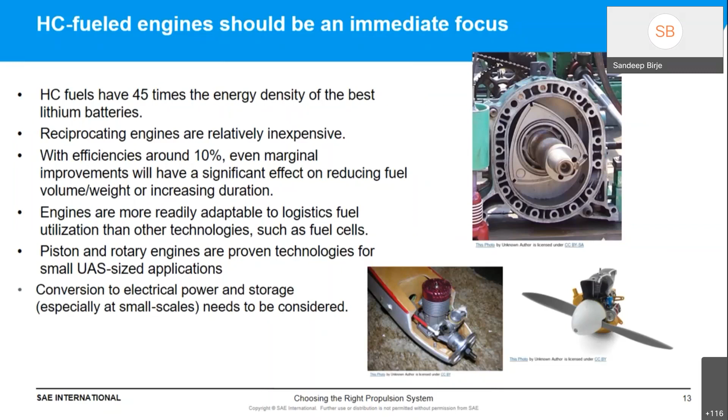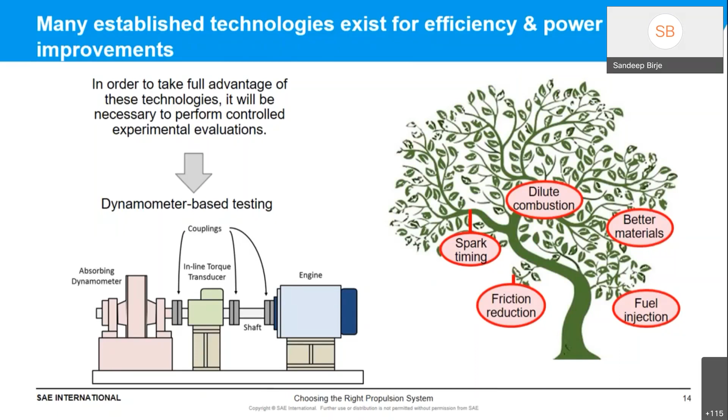So the engine-based dynamometer really is the primary means of advancing engine development. It is the primary research tool. It is used widely in the automotive industry. It is used widely in the development of generators and other means of transportation or power generation that involves a hydrocarbon fuel. The reason being is, one, it can manipulate speed and load independently.

You can determine the brake-specific performance, which is normalized for power, to allow performance comparison between engine types. That is very important, and that is one of the main drivers for developing the standards or the recommended practices in this space. It is also used for the accurate characterization of combustion, since you can manipulate both the speed and load independently.

Now, it has a disadvantage in the fact that dynamometer-based testing is expensive, requires sophisticated coupling. It also does not replicate the altitude unless it's placed inside an environmental chamber. Therefore, you need correction factors, which are also to be included in any standards and recommended practices. But in summary, virtually all engine-based standards really center on dynamometer-based testing protocols, which is something that we are actively doing in this committee.

So, in short, power measurement standards are really needed. They're not out there today for small UASs, especially for those systems that have been developed for the hobby community. There are a number of different methods out there for power measurement, which vary widely. That needs to be consistent. Correction factors also need to be developed that are reliable and useful. Preconditioning is often overlooked as well, and that's something that needs to be considered, and on and on.

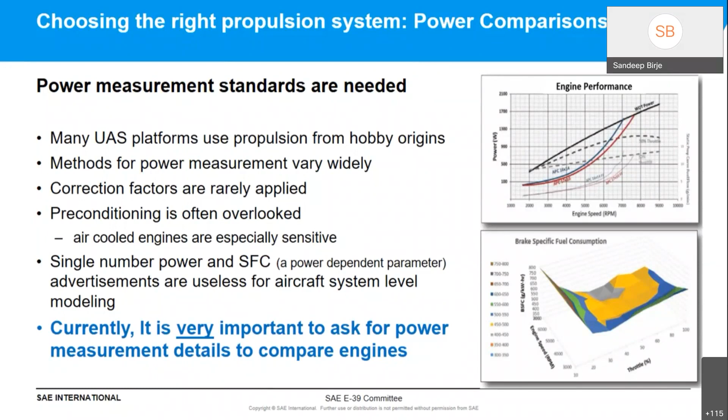But I just want to conclude that it is very, very important to get a standard or to evaluate your engines according to a set standard in order to do a fair evaluation on them. That's the primary need for this standard committee and for the work that we're doing.

The committee recently published a recommended practice, number 6971, to deal with engine test protocols for small UASs. We based our recommended practice on standards developed for larger automotive scale engines, and then made several caveats, tailoring them to be more relevant and specific to the small UAS engines out there.

In general, one concern was that as you reduce the torque, meaning the power or size of the engine, the accuracy becomes much more challenging to measure at the levels seen for larger sized, larger torque engines. Therefore, if your equipment is only able to measure up to plus or minus 5%, going down to 0.5% in a standard is not feasible or relevant. So we expanded the accuracy levels.

There was also some consistency in terminology that needed to be defined. For example, simple terms such as engine and horsepower mean different things to different communities. The standard goes ahead and defines those in a precise way.

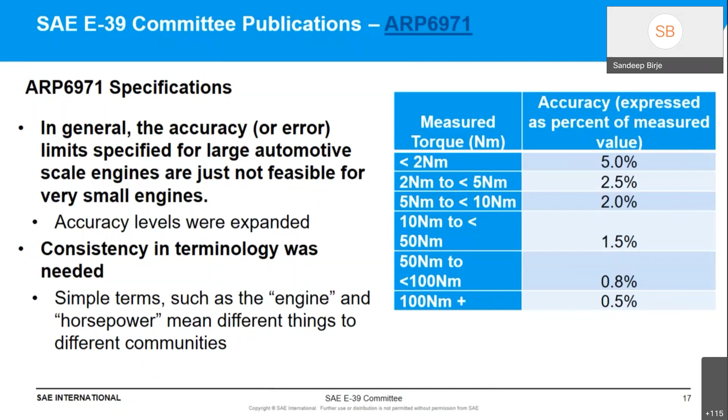For those who are interested, we have an introductory overview of the committee and our goals, and I'd refer you to WP-0009 to read further on UAV applications and propulsion technologies that drive the development of UAV propulsion standards.

Since publication of the recommended practice, we've convened to decide on a new project proposal. The consensus is that we really need a new endurance test engine standard, which we feel is a logical extension to the recommended practice, for testing the engine durability.

The endurance test principles we'd like to include are: a test plan that would be written and disclosed for the user community to use, defining critical dimensions, determining how to incorporate engine taxiing in a series of operational tests that might include conditions beyond typical flight requirements, and looking at the parasitic or other loads associated with the engine, including the electrical subsystems.

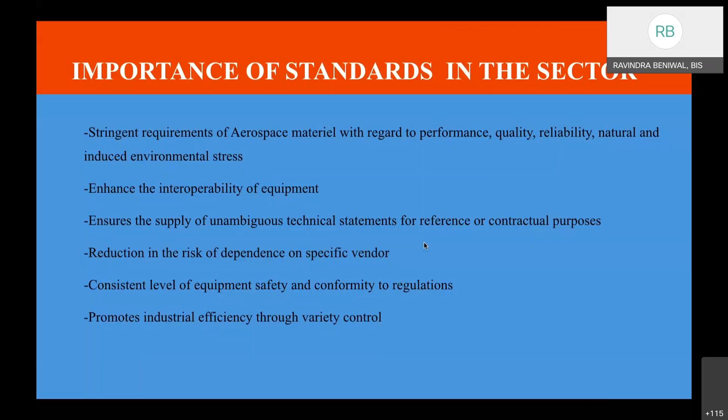If we talk about the quality ecosystem in India, through the Director General of Quality Assurance and the Directorate of Standardization under the Department of Defense Production, standardization is done through entry control and variety reduction, and various joint service specifications have been made. Adoption of Indian standards formulated by the Bureau of Indian Standards for material, equipment, test methods, etc., in preference to making departmental specifications to avoid duplicity and exercise economy of effort.

And we have active participation by the Defense Research and Development Organization, DRDO, Hindustan Aeronautics Limited, National Aerospace Laboratories, Indian Space Research Organization, in technical committees for the formulation of Indian standards and their eventual adoption.

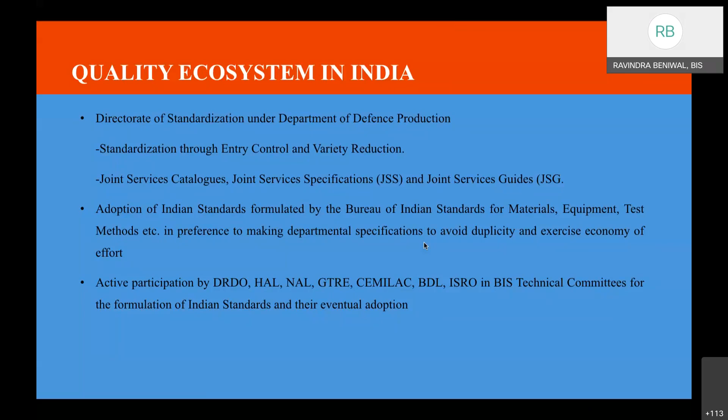The Bureau is supporting government initiatives and the National Civil Aviation Policy of India through a simplified and transparent system of standardization, testing, and certification, with greater use of technology without compromising on safety and security, and also enhancing ease of doing business through simplified procedures and e-governance.

This covers the entire aviation sector through standardization in a harmonized manner, covering cargo, general aviation, aerospace manufacturing, and skill development, and also supports MSMEs through reduction in licensing fee structure.

Now, if we talk about the standards formulation process at BIS, BIS follows 6 principles as per the WTO TBT agreement, that is the World Trade Organization Technical Barriers to Trade Agreement. These principles are transparency, openness, impartiality and consensus, effectiveness and relevance, coherence, and development dimension.

The structure of BIS standard formulation is through the governing council. After that comes the Standardization Advisory Committee. And beneath them are division councils and various sectional committees of the Bureau, which form the subcommittees or panels under them.

At BIS, standards are developed by the relevant technical committees. Technical committees of BIS comprise representatives of various stakeholder interests, such as industry, consumers, technologists, scientists, professionals, policymakers, and regulators. More than 10,000 experts are members of various BIS technical committees, which are distributed among 15 different division councils of various engineering sectors. Standards are developed keeping in view national interests and after taking into account all significant viewpoints through a process of consultation.

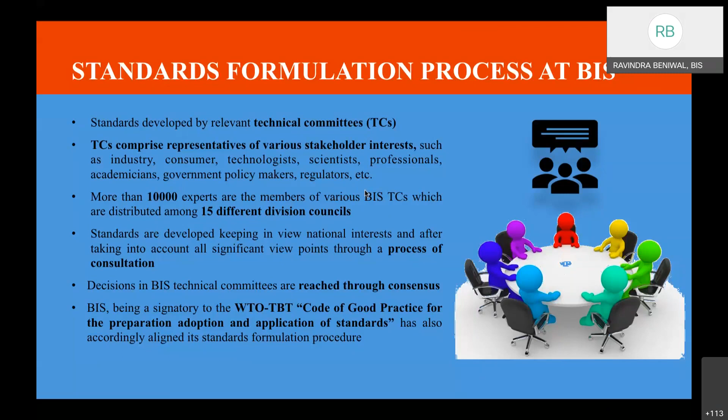Important standards formulated by BIS in the aerospace sector include various standards for aircraft electrical equipment, ground equipment and fasteners, aerospace quality management systems, gas turbine acceptance tests, various environmental tests for aircraft equipment, ATF, ultrasonic pulse echo testing, and aircraft tire, tube and valves.

In the emerging areas of UAVs, we have formulated standards on general requirements of remote pilot aircraft systems, standards on UAV testing and certification, and cybersecurity. The process of formulation of standards for drones for military surveillance, smart farming, and civil uses is also being undertaken by the committee. A standard on UAV traffic management is also at the formulation stage.

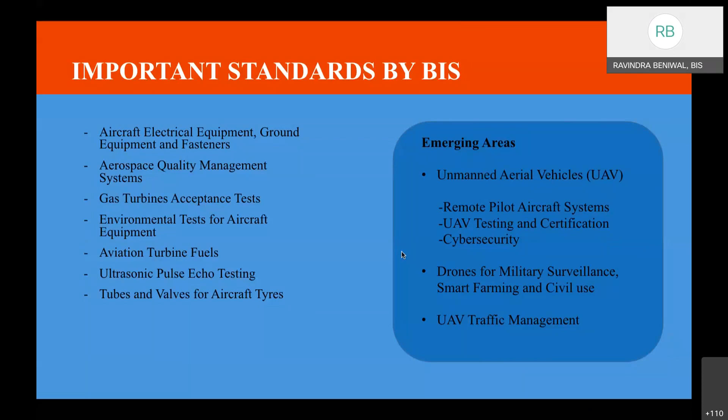BIS is one of the founding members of ISO. It is a signatory to the WTO Agreement on Technical Barriers to Trade, the TBT agreement, which was signed in 1995. As the national standards body of India, BIS participates in international standardization activities and projects India's interests and viewpoints during various stages of development of international standards. Harmonization of various Indian standards in the aerospace sector with international standards is also being done to facilitate trade and reduce duplicity of efforts.

BIS is actively involved in the working of ISO TC20, on air and space vehicles, and its subcommittee ISO TC20 SC16 on UAVs.

Key challenges for shaping the future include building a robust quality infrastructure and a self-attitude for self-reliance, with support expected from stakeholders, industry, academia, and government to enhance participation in standards formulation activity. There is a need to fuel trust, transparency, and stability in the activity, and to realize the potential of innovation and startups.

On the other hand, there is also a need to invest in R&D for alternative propulsion, commercial aircraft, and urban air vehicles for logistics, medical surveying, security, and the transport sector.

AeroCon is the flagship biennial premier international conference organized by SAE India Aerospace Forum and supported by SAE International. AeroCon 2022 is planned to be held in Bangalore, India on 2nd and 3rd of June, 2022. Technology has always been on the forefront for aerospace industry, incubating, nurturing and maturing many advanced technologies, from composites to advanced sensors to integrated vehicle health management. While globally the aerospace and defense industry has been rapidly advancing with new technologies and artificial intelligence, the Indian government is also actively promoting indigenization with cutting-edge technologies manufactured in the country under Make in India and Atmanirbhar Bharat initiatives. AeroCon 2022 will provide the much-needed platform in India for industry practitioners, academicians, researchers and students to actively exchange ideas, information and opinions, and share their research findings and experiences in aerospace engineering. The theme of the conference is Autonomous Airborne Systems: Trends, Challenges, and Opportunities. Various special topics of interest have been identified, including blended hybrid wing body designs, electric mobility, artificial intelligence, machine learning, and digital twins, at the cutting edge of groundbreaking aerospace technologies. The conference program is planned to have many plenary sessions from international experts, paper presentations, panel discussions and tutorials, spanning aviation, space systems, aeronautics, airborne defense systems, unmanned aerial systems and urban air mobility.

Please visit the conference website at www.saeindia.org/aerocon2022 to know more. Submit your papers and presentations for this conference, network with your peers and experts in the aerospace engineering community, and be at the forefront of aerospace technologies.

Hi everyone, how are you all doing? So,

We come to the end of the Aero Standards workshop. 2 days, 23 speakers, 4 parallel sessions, wow, knowledge-packed, very informative sessions. Hope you all gained some valuable insights into SAE standards and how to be part of these committees as well. So with this, we really hope you all have got all the information required for you to be part of these standard committees. With this, we come to the end of the Aero Standards Committee workshop. On behalf of SAE India Aerospace Forum, I would like to express a deep sense of appreciation for all our esteemed speakers.